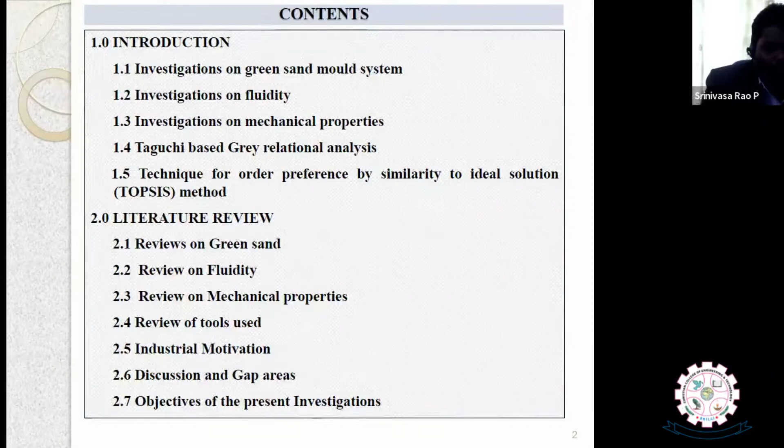So in the present lecture, we are going to discuss how to improve the casting product strength. In this talk, we are going to cover the green sand mold system, the investigations done on fluidity, and how we validated the product by studying the mechanical properties, and the technique we used to find the optimal properties - that is the Taguchi based method, and also the Technique for Order Preference by Similarity to Ideal Solution, also called TOPSIS method. We will also cover the literature review, the industrial motivation, the discussion, and the gap areas.

These are the things we are going to discuss - the experiment that has been carried out and the optimization carried out on the green sand mold, and the materials we have used for fluidity testing. So these are all the things we are going to discuss.

So, what are the various mold coatings that we have used to improve the fluidity, and what is the grain refinement that we have used, and what is the effect of that grain refinement.

There are so many grain refiners available in the market. Like yesterday, Sir was saying about graphene, which is also used to improve grain refinement, and titanium, boron, and niobium. These are all materials available in the market to improve the grain refinement of the material.

So what is grain refinement, we will see, and also what is the scrap that is affecting the fluidity, and metallography. Then we are going to study the effect of the composition of the molten metal on the mechanical properties, grain refinement on the mechanical properties, and the effects of the process parameters on the mechanical properties. So that is all.

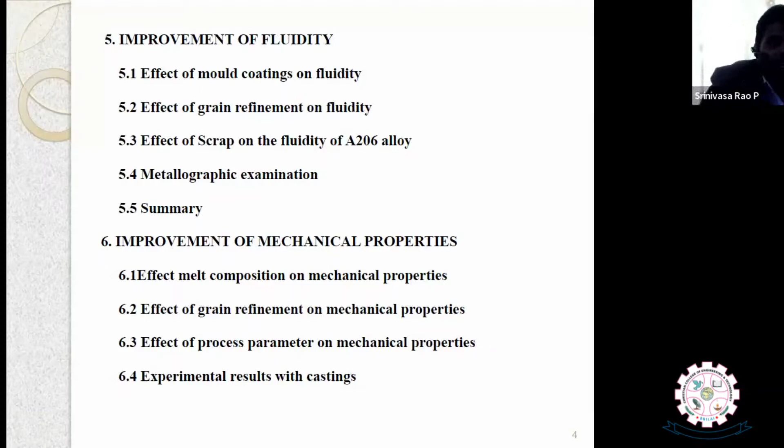Let me give you a brief introduction about the green sand mold system. Foundry is one of the ancient methods in metal forming.

According to the production data available, 70% of casting defects arise due to sand mold properties. That means if you are able to improve the properties of the sand mold, then automatically you will get good strength in the casting.

So the most common defects found in these castings are porosity, which is the major problem, along with very poor surface finish, dimensional variation, shrinkage cavity, scabs, and rat tails. You might have studied in your subject what are the various casting defects.

These defects can be minimized by proper control of properties like green compression strength, permeability, hardness, and bulk density. These are the main properties which decide the properties of the sand mold.

And nowadays, materials are being added in the foundry sector to improve the sand mold, such as wood flour, sea coal, coal dust, husk, fly ash, molasses, etc. These have been used to enhance some specific desirable properties of the molding sand.

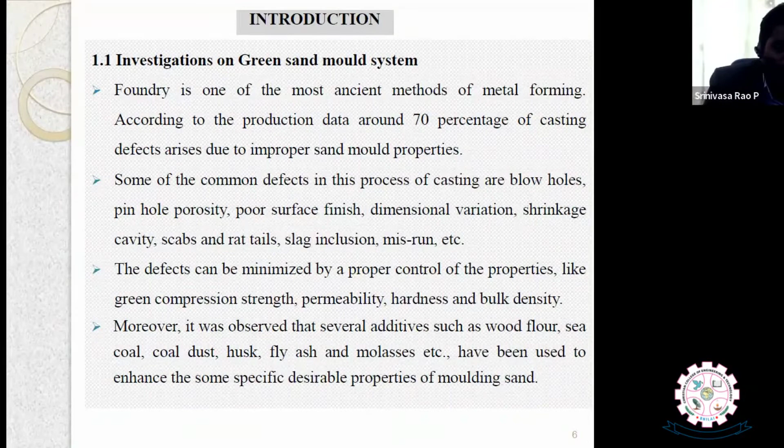If you have a low green compression strength, that leads to poor casting processing, poor surface finish, dimensional inaccuracy, and also it will create porosity. Similarly, low permeability may be a cause for blowhole and misrun type defects.

Misrun is nothing but fluidity - the ability to flow the metal will be decreased. If the ability to flow the metal decreases, then there will not be complete casting. There will be some defect, and that defect is known as misrun defect, or we can call it a fluidity defect. And one more thing we can talk about is bulk density.

That is the bulk density, which is related to the flowability of the molding sand.

So in such a way, there are many green sand mold properties influenced by a large number of parameters, which are controllable to varying degrees in our foundry. That is why, being a foundry man, he should be in a position to select the molding composition to get a substantial increase in sand mold properties, which in turn leads to quality castings. So quality castings depend upon the mold properties.

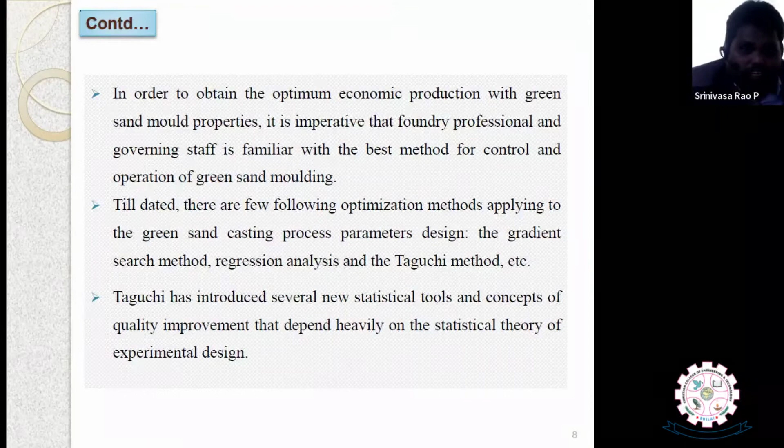So till now, there are many optimization methods used to produce quality green sand castings. They optimized the casting process parameters by using various optimization techniques, regression analysis, Taguchi method, etc. So, what is the Taguchi method?

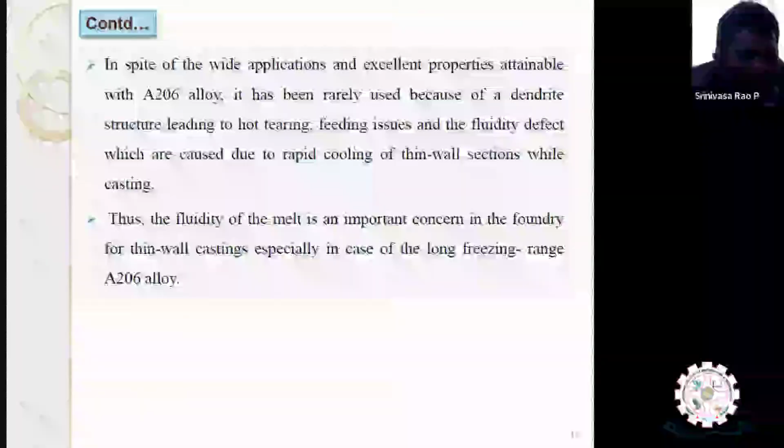We don't require that now. After making the sand mold, we are going to talk about the A206 alloy, that is an aluminum copper alloy, which has been made by using the optimized properties of the optimized sand. Optimized sand means we have taken certain parameters and made the green sand mold, and in that green sand mold we have made the casting of A206 alloy.

The problem with the A206 alloy, the aluminum copper alloy, is that while casting it, the main defect we found is that the fluidity of the melt is very important.

Misrun is the major defect in the A206 alloy. This is because the A206 alloy is generally used for making thin wall castings, and it is also called a long freezing range alloy. So that is the reason why this misrun defect occurs.

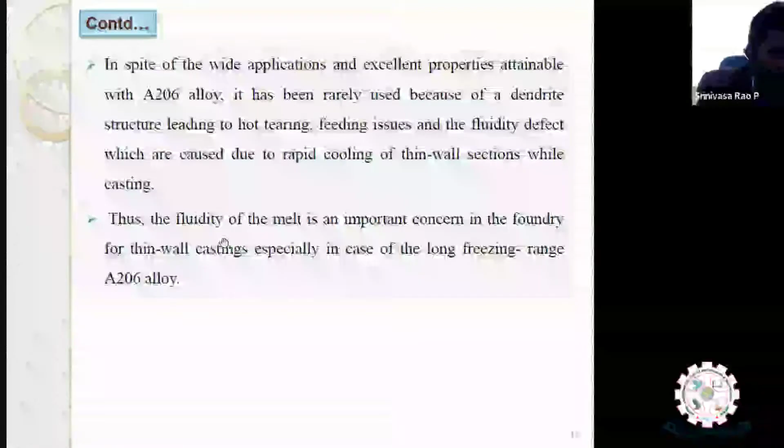A206 alloy belongs to the aluminum copper alloys, which are widely used for manufacturing thin wall castings in automotive and aerospace industries, due to high strength to weight ratio and virtuous mechanical properties. It has very good mechanical properties and high strength to weight ratio. When you talk about the marine field and aerospace industries, they think about high strength and low weight. They need less weight and more strength.

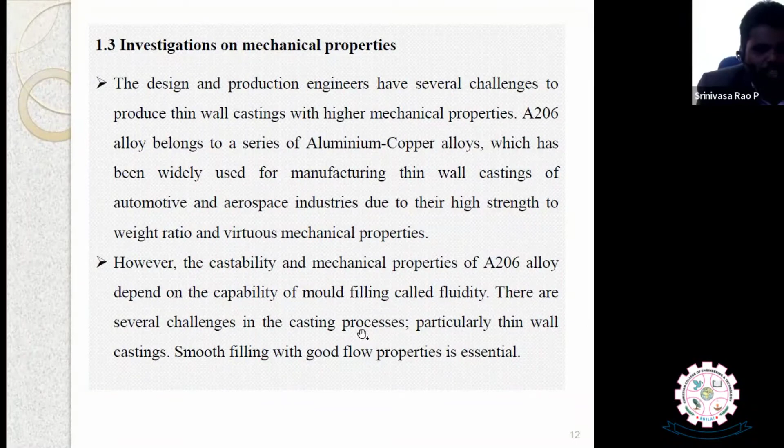However, the castability and mechanical properties of the A206 alloy depend upon the capability of mold filling, called fluidity. So there are several challenges in the casting process, particularly thin wall casting. Smooth filling with good flow properties are very much essential.

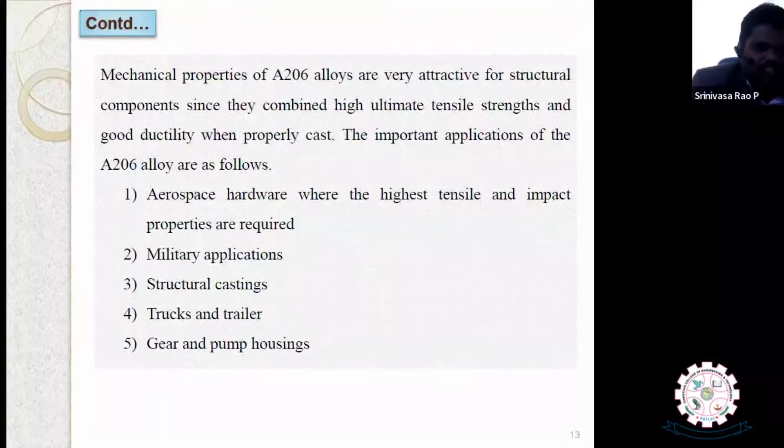Mechanical properties of the A206 alloy are very attractive for structural components since they combine high ultimate tensile strength with good ductility when properly cast. So the important applications of the A206 alloy are aerospace, military applications, structural casting, trucks and trailers, and gear and pump housings. So they have got a huge number of applications.

So the technique that we have used to optimize the casting process parameters is Taguchi based gray relational analysis, because the optimal process parameters selected are not only to improve process quality but also to be least prone to the deviation of environmental conditions and other noise factors.

Several experiments need to be carried out when the number of process parameters increase. Naturally, when the number of process parameters increase, we need to carry out multiple experiments, and it is also a tedious task. So to reduce such a tedious task, we use optimization techniques. In this particular research, we have used the Taguchi based gray relational analysis technique.

Some of you know about the Taguchi technique very well, because some of you are from a manufacturing background. We use orthogonal arrays to study the total process parameters and to study the quality characteristic by using a parameter called signal to noise ratio. I will explain this further. The SN ratio will decide the quality characteristic of the casting product, whether lower the better, higher the better, or nominal the better.

For us, we require the mechanical properties to be high, so we will take the SN ratio as higher the better mode. And also, if there are multiple responses...

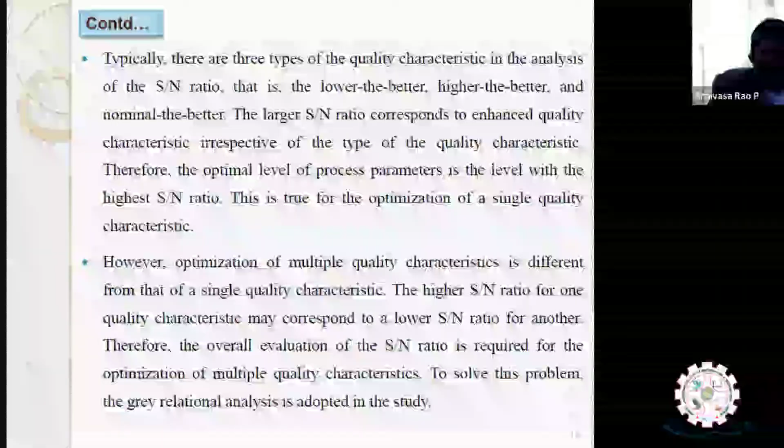Then what we do is convert those multiple characteristics, multiple quality measures, into a single characteristic, and that is what we do in gray relational analysis, to know the grade and to note the single quality characteristic, the grade, and finally the rank, and which composition of the material is giving us the best quality product, or in which composition we are getting more strength.

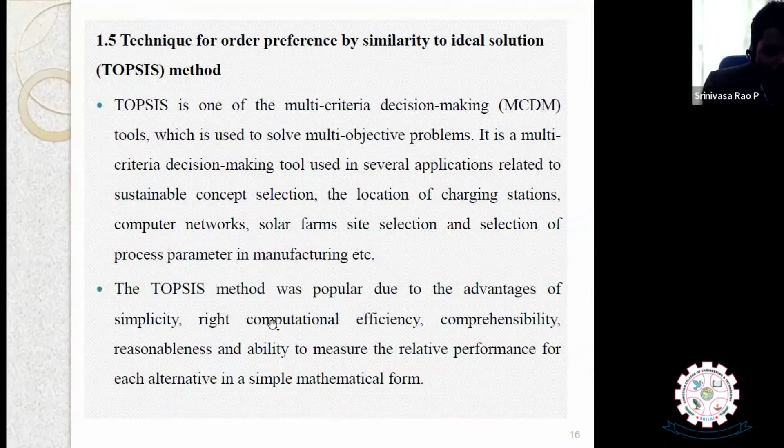TOPSIS is also another technique which we have used just to compare both the gray relational analysis and this technique. Finally, we are going to suggest which method is useful or suitable for the better optimization of the composition.

So many literature reviews have been carried out on green sand. From 1974 onwards, this research has been carried out. Even before that, they applied statistical design of experiments techniques to study and control the properties of green sand and resin bonded sand systems. However, the effect of sand grain size and the important property of permeability were left out in their analysis.

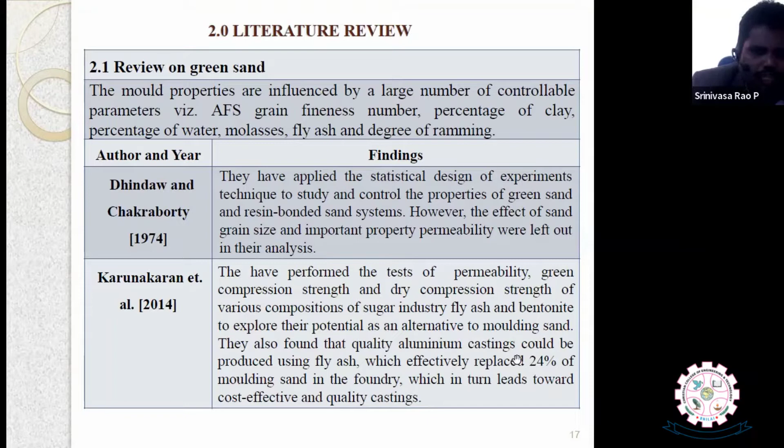Karunakaran et al., 2014, found that quality aluminum castings could be produced by using fly ash, which effectively replaced 24% of the molding sand in foundry, leading to cost-effective quality. They also studied the permeability and mechanical sand properties of green sand by adding fly ash and sugarcane molasses, etc. So these are the literature reviews that various people have carried out.

In 2012, the optimum process parameter values for multiple objectives, namely green compression strength, permeability, and mold hardness, were found using the genetic algorithm and particle swarm optimization.

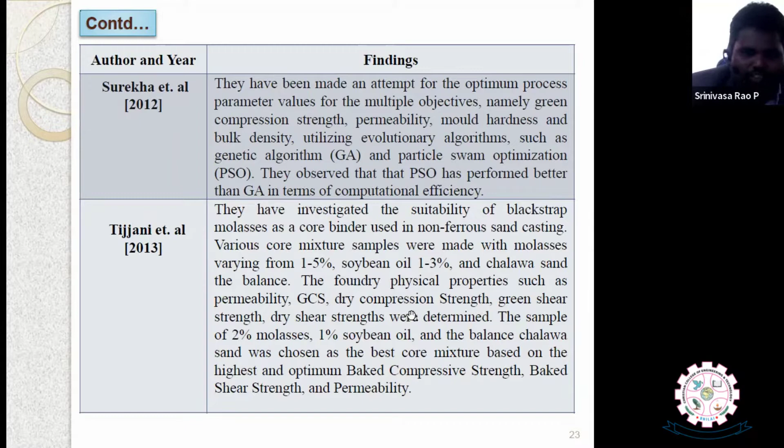In 2013, blackstrap molasses was used as a core binder to improve the sand and mold properties like permeability and green compression strength. Fluidity is also relevant here, as it relates to the misrun defect, and many studies have been carried out in this particular field.

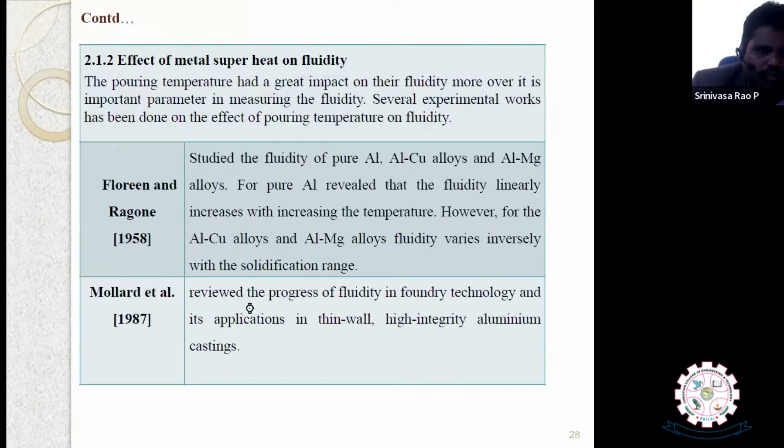Coatings also will affect and bring a positive effect on the fluidity. Several researchers have carried out research on mold coatings to improve the fluidity and reduce the misrun defect.

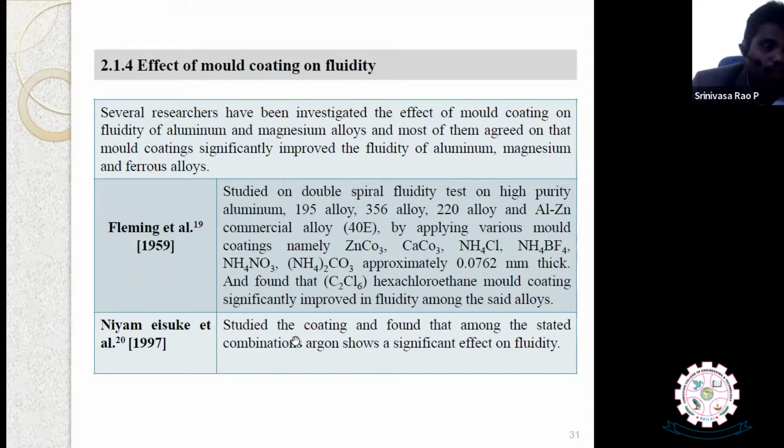So what is the motivation? In present day foundries, a quality molding sand mixture is very much required. This can be achieved by the set of input variables required to achieve the desired levels of output, that is, mold properties. Mechanical sand properties such as green compression strength, permeability, hardness, and bulk density are the major sand properties.

When it comes to aluminum alloy casting, the industrial demand for thin wall castings in aluminum alloys plays a vital role in producing lightweight castings and provides new opportunities for aerospace and automotive industries in producing lightweight structures with good mechanical properties.

These opportunities can only be realized when foundries are confident in their ability to produce thin wall castings. Production of thin wall castings is constrained by the fluidity of the molten metal. Therefore, the primary issue that must be addressed in producing thin wall castings is fluidity.

Fluidity of the molten metal is of significant importance in producing sand castings, particularly complex shape castings. That is why in the present investigation we have used scrap, mold coatings, and other elements like nickel to improve the composite material, that is, the metal matrix material A206 alloy.

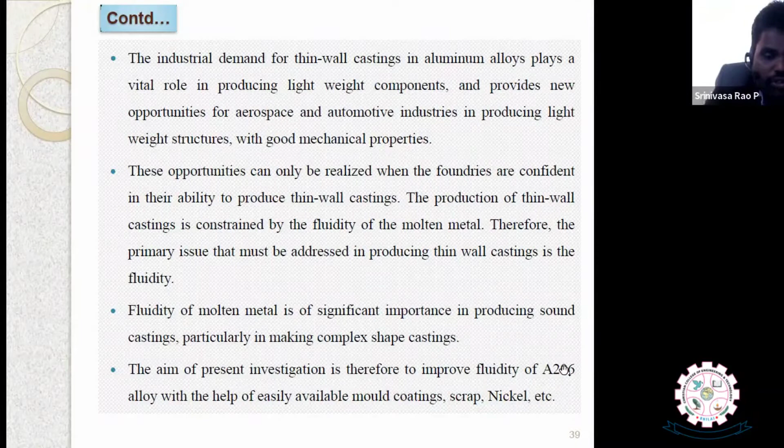So that is actually why we have to study what the research gaps are in this particular field. Several studies have been conducted on molding sand, binders, and additives, which have been widely reported in literature.

However, the influence of molasses and fly ash, along with grain fineness number, bentonite, moisture, and degree of ramming on the molding properties of green sand has not yet been investigated, and this study has been carried out.

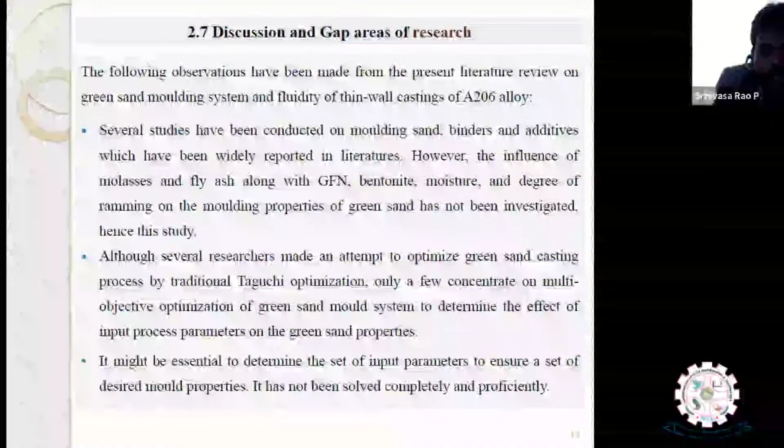Although several researchers have made an attempt to optimize the green sand process by the traditional Taguchi method, few have used multi-objective optimization techniques. It is essential to determine the set of input parameters to ensure the desired mold properties, and this has not been solved completely and proficiently.

Many others have noticed that pouring temperature and grain refinement play a significant role in the fluidity of the aluminum alloy. They made an attempt to study the influence of pouring temperature, alloying elements, and grain refiners, but no report or literature was found on the influence of pouring temperature, molding coatings, and scrap on the A206 alloy till date.

So therefore, to simultaneously study AFS and grain fineness number, and also molasses etc. to improve the fluidity, and also aluminum, titanium grain refiner in combination with various process parameters such as scrap and nickel, and fluidity using coated thin cross sections of A206 alloy, has not been investigated till date.

So our objective is to improve the green sand mold properties using various input variables and find the optimal combination, and also to determine the fluidity and mechanical properties of the A206 alloy, and study the effect of mold coatings at three different pouring temperatures.

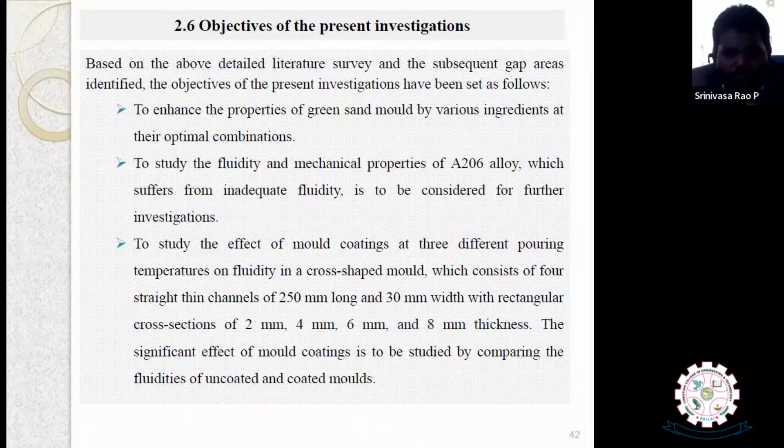By using grain refiner in combination with scrap, through design of experiments, we cast and study the fluidity by varying these process parameters. Similarly, we study the influence of pouring temperature on fluidity, and the influence of pouring temperature and grain refinement on fluidity and mechanical properties of the A206 alloy.

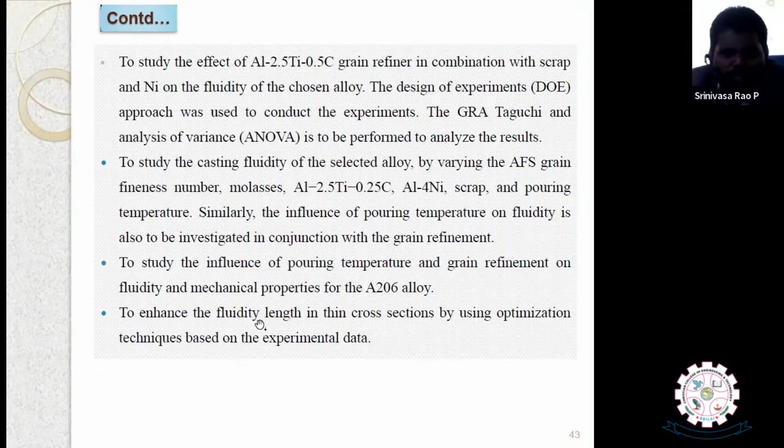Ultimately, we are going to enhance the fluidity of the thin cross section by using optimization techniques based on this, and various methodology were followed.

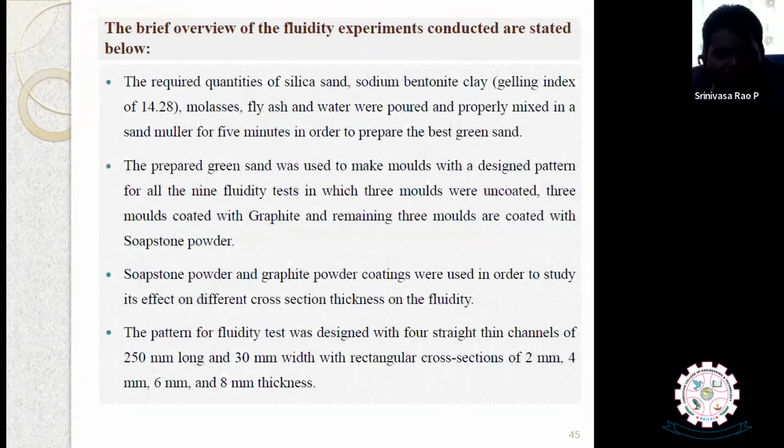These are the various tests that have been carried out. This is the sand equipment, and this is the sand muller, which is used to mix the sand with various sand additives, like fly ash, molasses, and bentonite clay that we have added.

With variable proportions added, we made the green sand with the help of a sand muller. After making the green sand, we made the sample out of this sand composition using a sand rammer. With the help of the sand rammer, we made the sand sample, and this sample is used for testing.

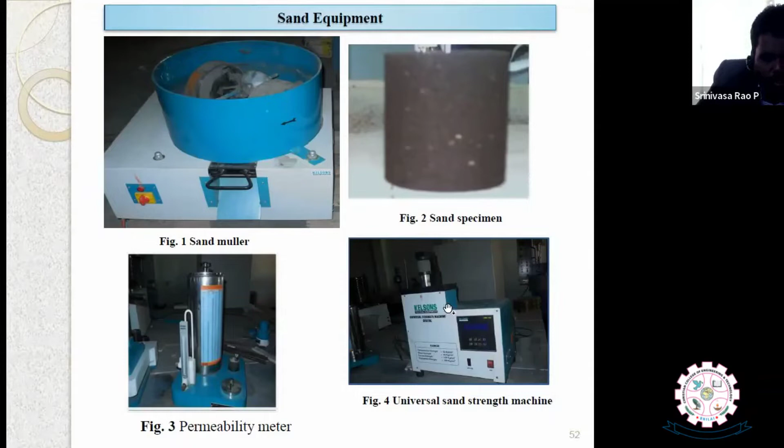We tested the permeability of the sand and the tensile strength. To find out the tensile strength, we used this equipment, known as the universal strength machine.

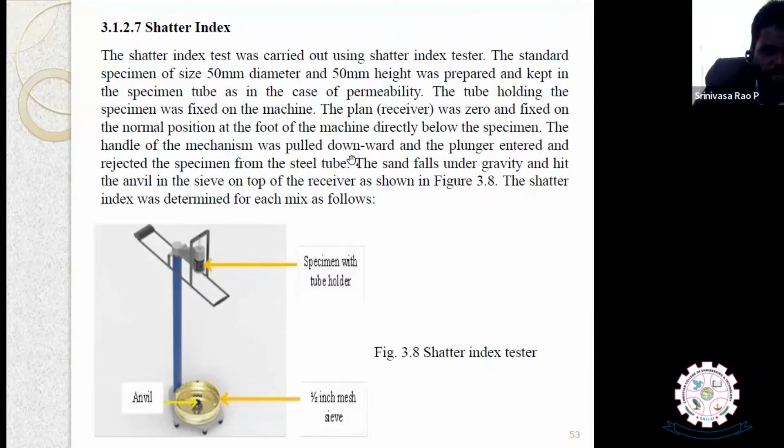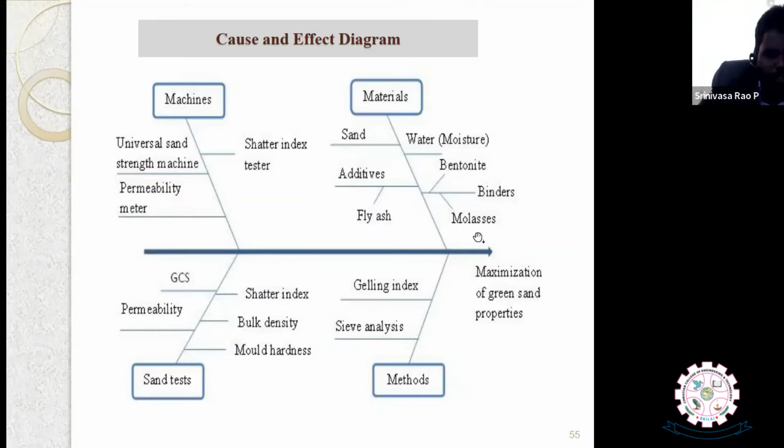These are the machines used to increase the strength of the green sand mold, and the tests carried out. The methods and materials include sand, additives, fly ash, water, bentonite, and binders. The objective is to improve the green sand properties.

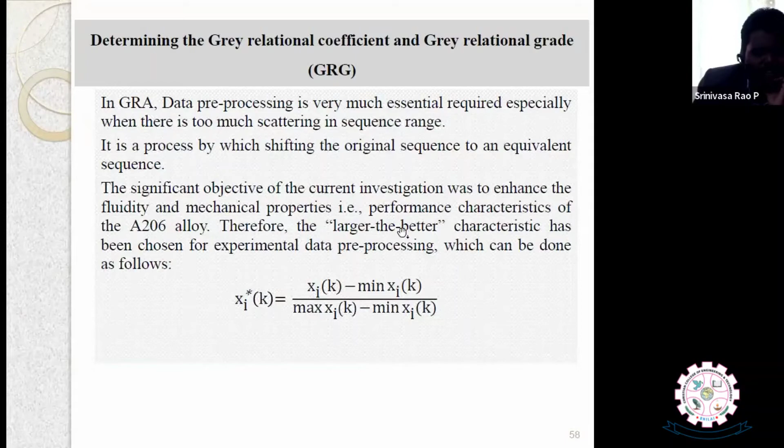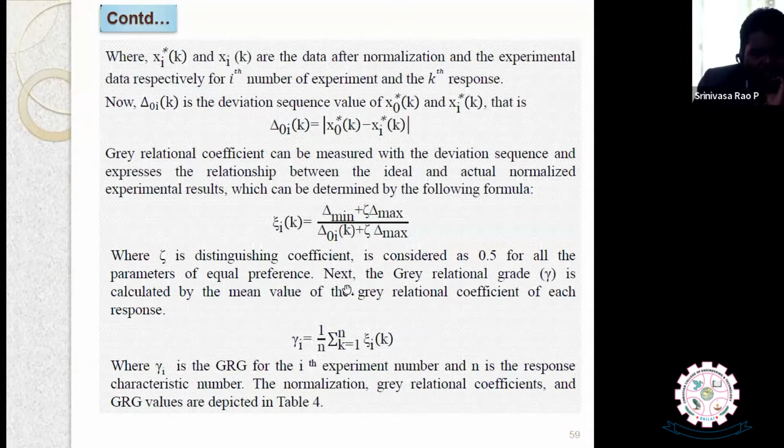After finding the deviation sequence, this is the normalized data. From this we calculated the grey relational coefficient based on the responses we obtained, and then the grey relational grade. Based on the grey relational grade, we did the ranking.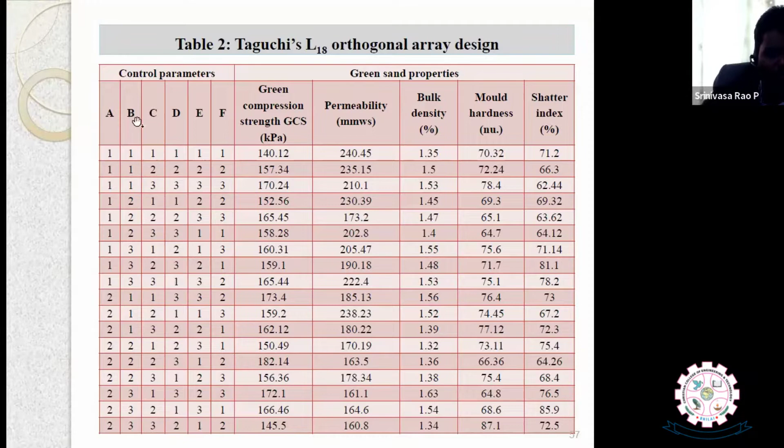If you see the seventh experiment - at this particular composition we see level 1, level 3, level 1, level 2, level 1, and level 3, corresponding to A, B, C, D, E, F, which represent grain fineness number and the other parameters at level 1 and level 2. So at these particular levels, we found the results.

So this is the level, this is the composition at which we have got the best properties of the green sand, we can say, and that is what the gray relational grade decides. So now, the larger the gray relational grade, the closer will be the product quality to the ideal value.

Therefore the optimal levels of the green sand are A1, B3, C1, D1, E3 and F1. They are represented in table 5. So A1, B3, C1, D1, E3, and F1.

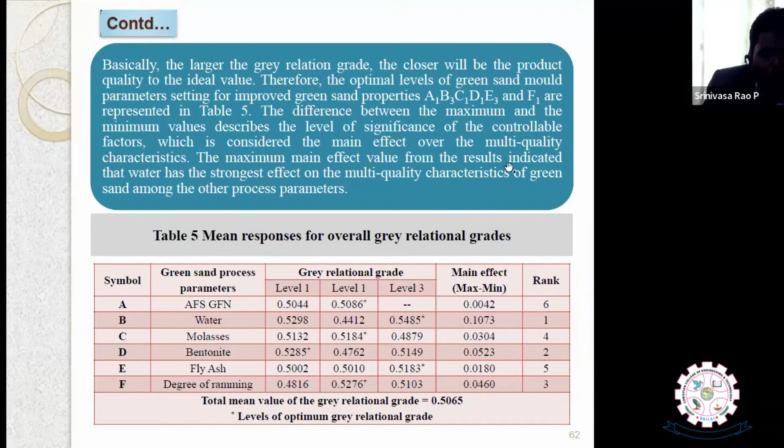This is the main response table, and then we have carried out the ANOVA analysis with the help of the Minitab software. So we get this. B is the factor, water percentage, followed by D and then F. What are B, D, and F? You can see, water and bentonite and degree of ramming.

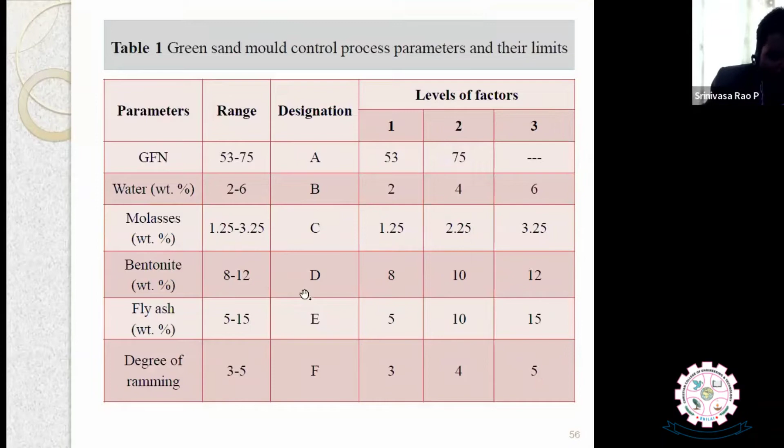So these are actually the influencing process parameters to improve the property. What is the maximum percentage? That is water. So moisture plays a very important role to improve the property. We may add many other materials like bentonite clay, corn flour, coal powder, or fly ash, and so many other products, but moisture plays a very important role because that is the binder basically.

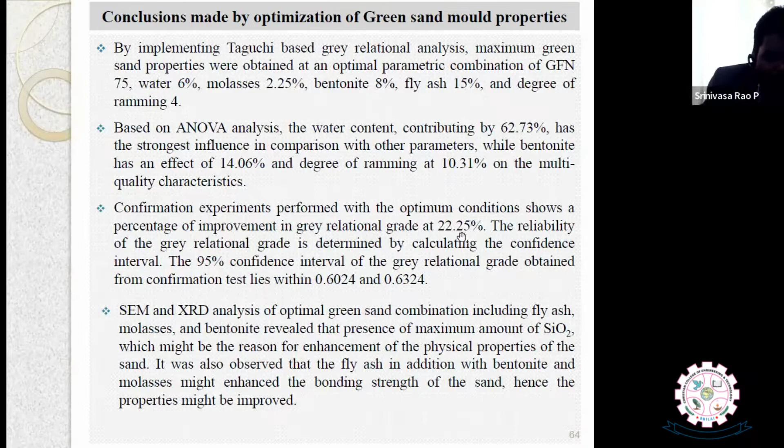So the optimal process parameter combination we have got is grain fineness number 75, water percentage 6%, molasses 2.25%, and this is the optimal composition. Based on the analysis, water content contributes 62.73% as the strongest influence compared with the other parameters. Later, confirmation experiments were carried out and we found that the grey relational grade increased to 22.25. Then XRD analysis was also carried out.

Now we will come to the fluidity of the A206 alloy. This can be improved, and now we have optimized the green sand properties. Now we have come to improve the thin wall casting fluidity of the A206 alloy. The problem is mold filling, that is misrun defect, or we can call it a fluidity defect.

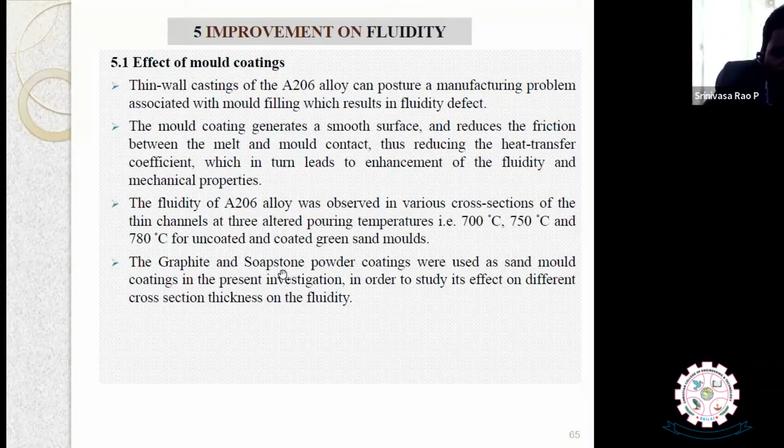So we have added various coatings. Graphite and soapstone powders are mainly used as sand coatings in the present investigation. What is the composition of the A206 alloy? Copper percentage is 4.25%, and of course there are other miscellaneous materials, and aluminum, mainly aluminum and copper.

So we have used pure aluminum and made the A206 alloy, and this is actually used for testing the fluidity. 2 mm, 4 mm, 6 mm, and 8 mm thickness of the cross section, because we need to find out mainly the fluidity of the thin cross sections.

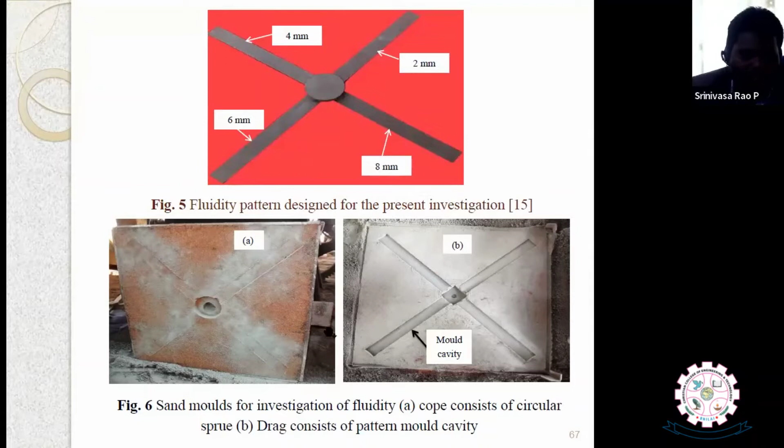So to know the fluidity of the thin cross sections, we have taken 4 cross sections of different thickness, and this is the mold we have made with the help of this pattern. This is the mold cavity, and we have used that optimized sand for the mold, sand mold, and made the castings.

First we have done the casting without coating, that means uncoated, at 3 temperatures: 700, 750 and 780. Then graphite coating at 700, 750, 780, and soapstone powder coating at 700, 750, 780. These are the pouring temperatures, and the fluidity length that we have obtained at different temperatures is this one.

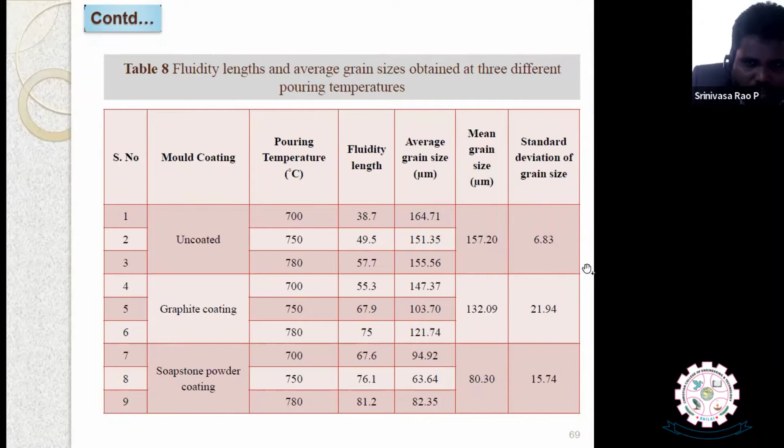After this, we have studied the microstructure and found out the grain size, average grain size, and the average grain size is this one. Different average grain sizes, plus mean grain size, and this is the standard deviation.

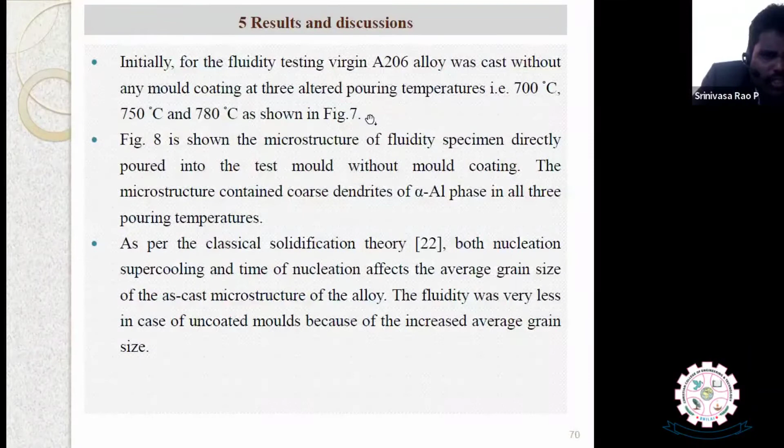So what we found is, without mold coating, the pouring temperature is as shown before. Figure 8: microstructure of the fluidity specimen directly poured into the test mold, and this one.

Graphite mold coating, let me explain. A highly suitable and appropriate, significantly non-porous and gentle mold surface can be produced by the graphite mold coatings. That is the reason why it is suitable for manufacturing ferrous and non-ferrous castings also. They will use this graphite powder.

Soapstone powder, why we use it, is because it is obtained from the hydrous magnesium silicate mineral. It is extensively used as a stuffing material, having hardness value of 1 and density 2.6 to 2.8. It is used in many applications because of low hardness, high melting temperature, sufficient chemical inertness and adhesion capability for surface coating, and high thermal conductivity. It improves cracking resistance, adhesion, and barrier properties.

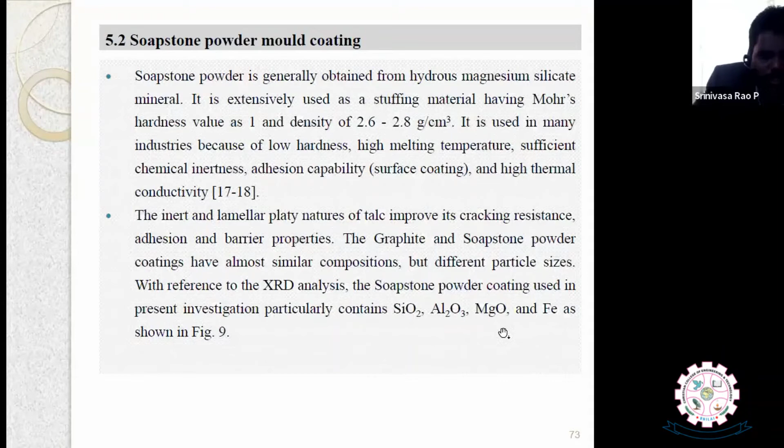The graphite and soapstone powders have almost similar composition but different particle size. With reference to the XRD analysis, the soapstone powder coating used in the present investigation contains particularly silicon oxide, aluminum oxide, magnesium oxide, and ferrous. We have also carried out the SEM and EDAX analysis for soapstone powder, and this is what we obtained.

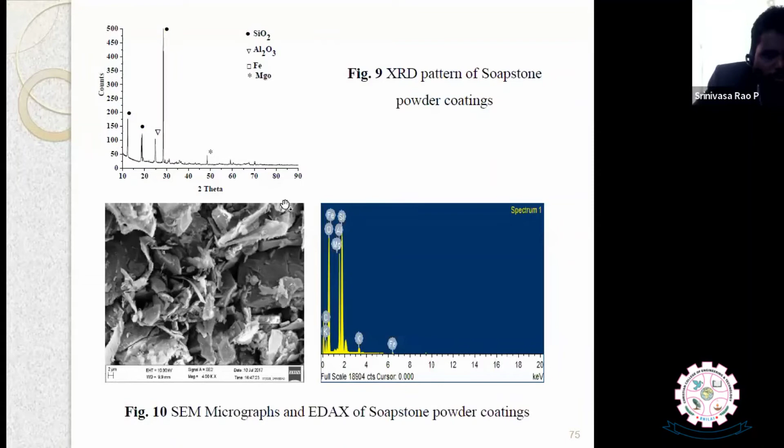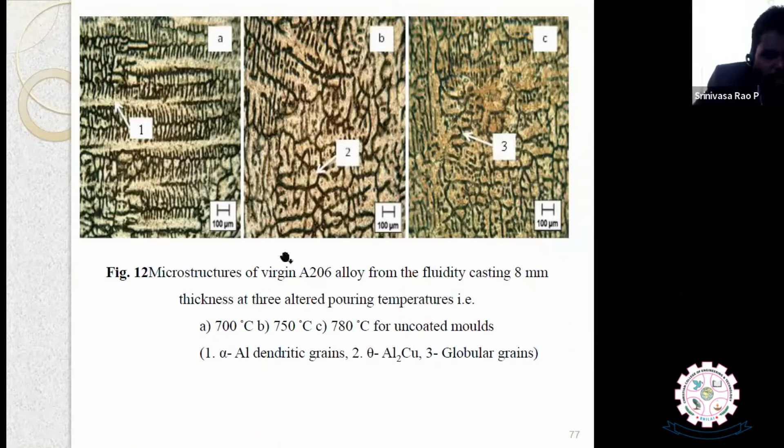These are the castings made with the help of coating, versus uncoated castings if we do not use the coating - you can see the difference. The corresponding microstructures show alpha aluminum dendritic grains, the second stands for aluminum copper, and the third one shows globular grains. This is for the uncoated specimen at various pouring temperatures: 700, 750, and 780.

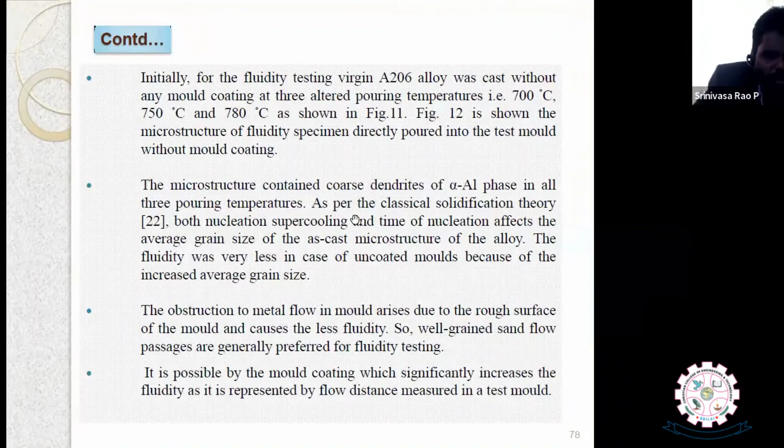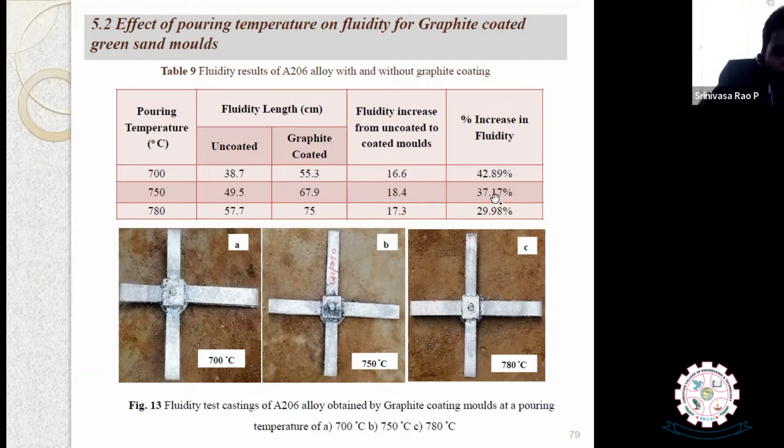So initially, then after that we did experiments with graphite coated green sand molds also for that optimized sand. We have got values for three different temperatures, uncoated and graphite coated. See the difference, how much fluidity increased by using the graphite coated sand mold. This is how the casting looks at 780 degrees centigrade, and this is how the fluidity increased - we have compared uncoated and graphite.

One thing observed is that fluidity was increased with increased cross section. Naturally, according to the formula, if we increase the thickness, as thickness increases, the fluidity also increases because it gets more space for cooling. That is the reason why at 8 mm cross section we found the maximum fluidity. These are the corresponding microstructures we see for the graphite soapstone powder.

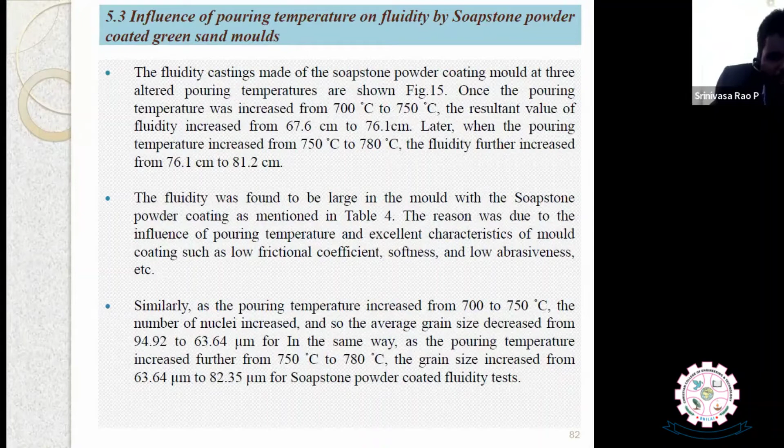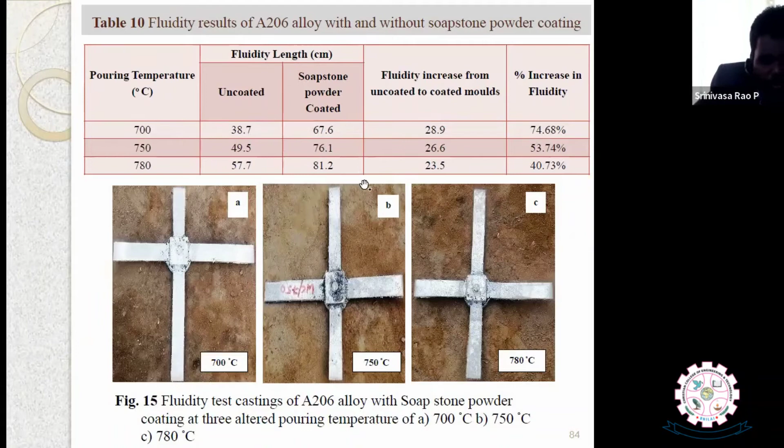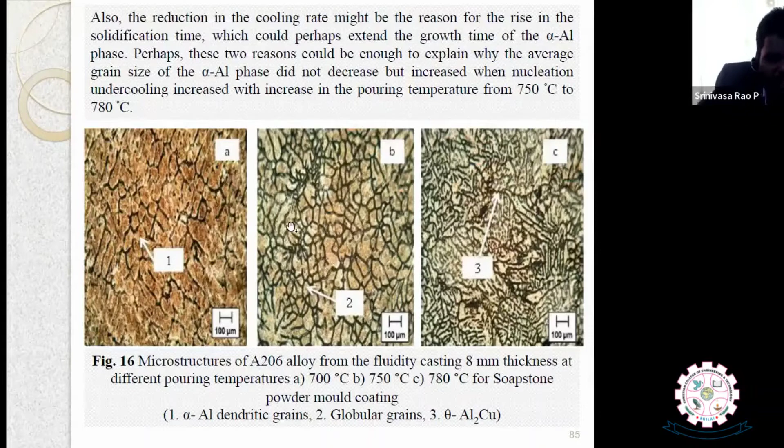So the best composition that we have got is soapstone powder only, because of the high melting point and high resistance, the fluidity increase is more as compared to uncoated and graphite. Soapstone powder has given the best results as compared to previous coatings. At 750 degrees centigrade, we see more globular grains, you can say more equiaxed grains. If the equiaxed grains are more, then the material will be stronger.

So the resistance effect - it was observed through experiment that the fluidity length increases slowly with the increase of cross section. The reason was the time required for the solidification of the metal to fill the mold cavity might increase as thickness of the cross section increases. So as thickness of the cross section increases, the time required for the metal to solidify also increases. Fluidity in the soapstone powder mold was higher compared to the mold with graphite coating, followed by the sand mold without coating.

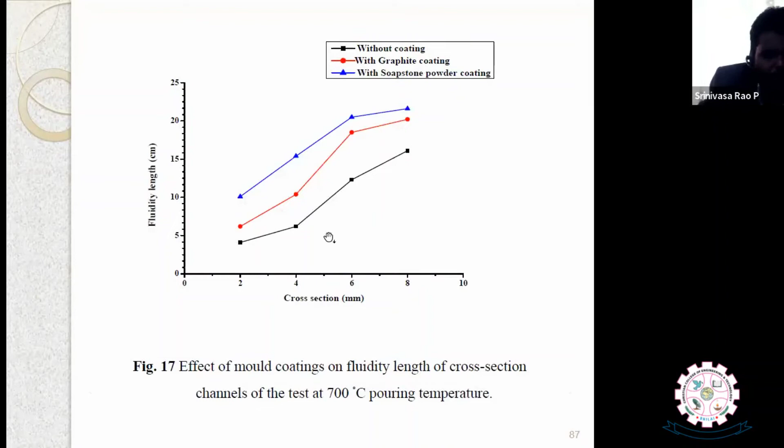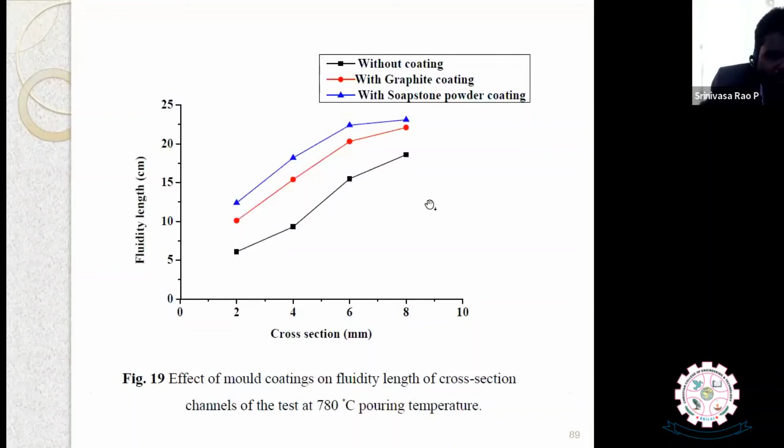More globular grains are obtained at 750 degrees centigrade. The fluidity length has been increased by influence of pouring temperature in the range of 700 to 750 degrees centigrade for both the graphite and soapstone powder mold. The reason might be due to increased supercooling and nucleation.

So then we'll come to optimization of the various process parameters of the casting process to improve the fluidity and mechanical properties of the A206 alloy. So what are the various casting parameters?

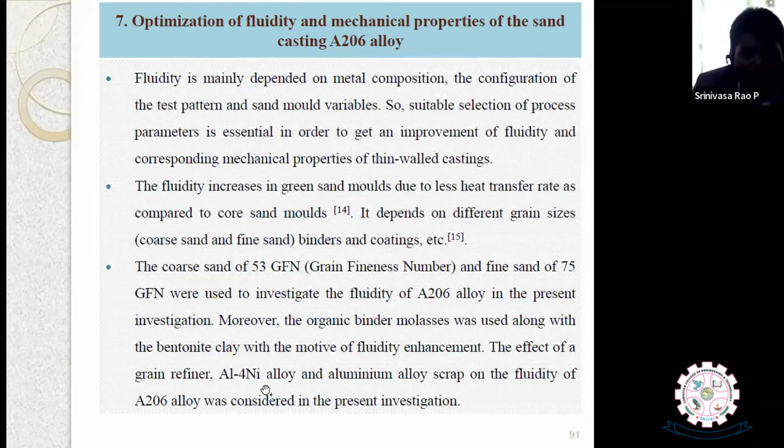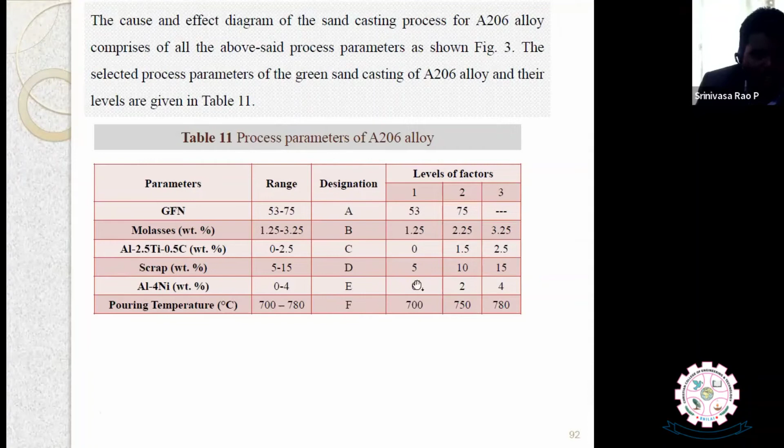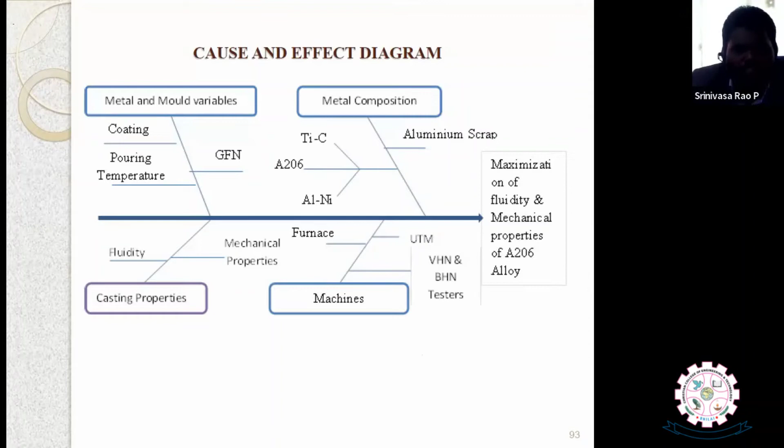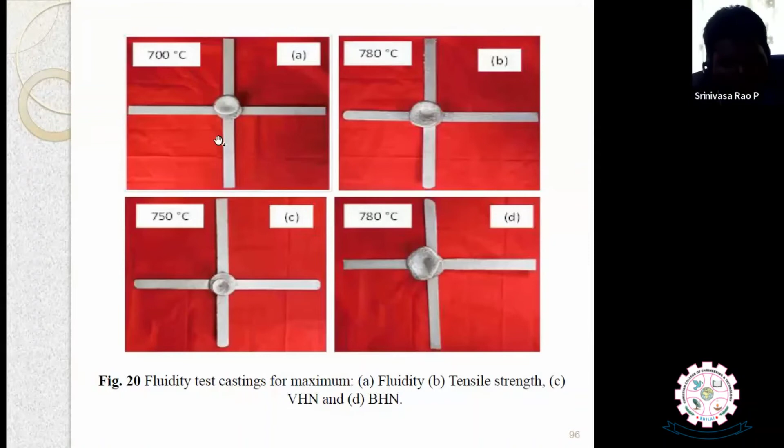We have taken the sample from the cross section and made tensile test specimens to carry out the mechanical properties, tensile strength, etc. And then we have carried out mechanical properties like Vickers hardness and Brinell hardness. So these are the situations.

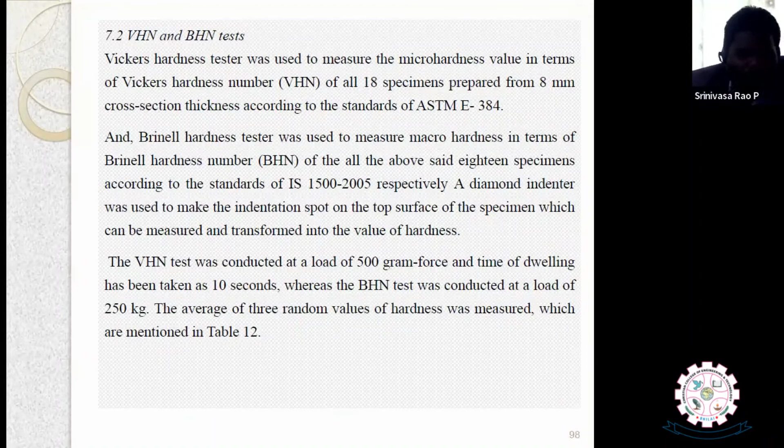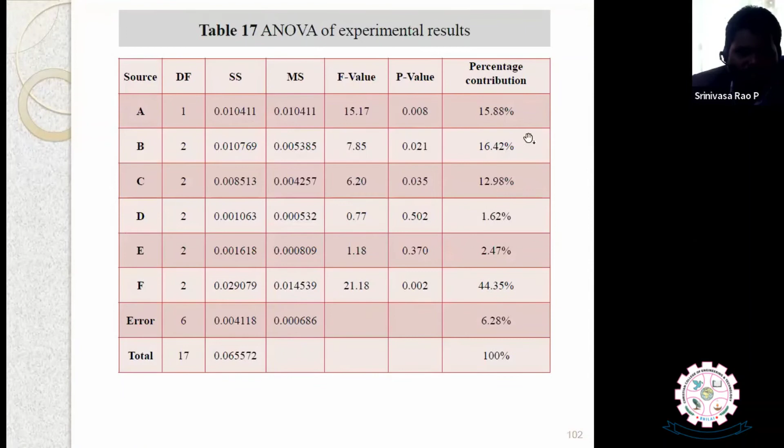That is the maximum contribution, and after that the grain fineness number also plays a maximum contribution, and then B is the molasses. So grain fineness number, molasses, and pouring temperature are playing mainly vital roles to improve the quality of castings.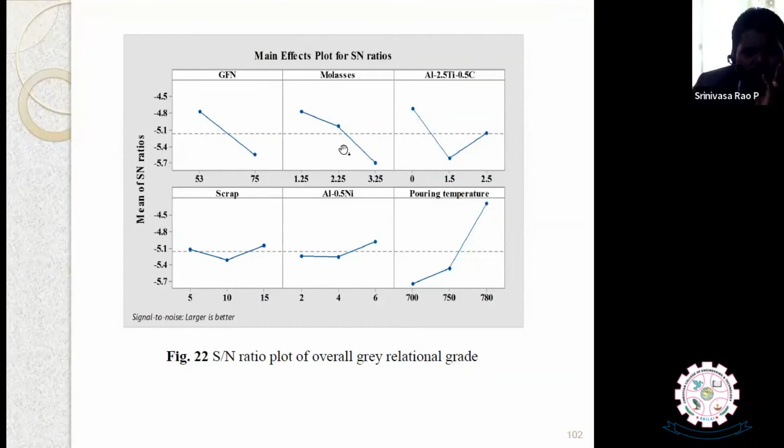So these are the graphs you see here: the SN ratio graphs and effect of pouring temperature. The linear relationship between pouring temperature and fluidity describes that increasing pouring temperature causes delay in the nucleation and growth of fine grains at the tip of the molten metal in the test channel, hence the fluidity increases.

He has given the reason why pouring temperature increases the fluidity: it delays the nucleation and growth of the fine grains at the tip of the molten metal. That is the reason why the fluidity length increases.

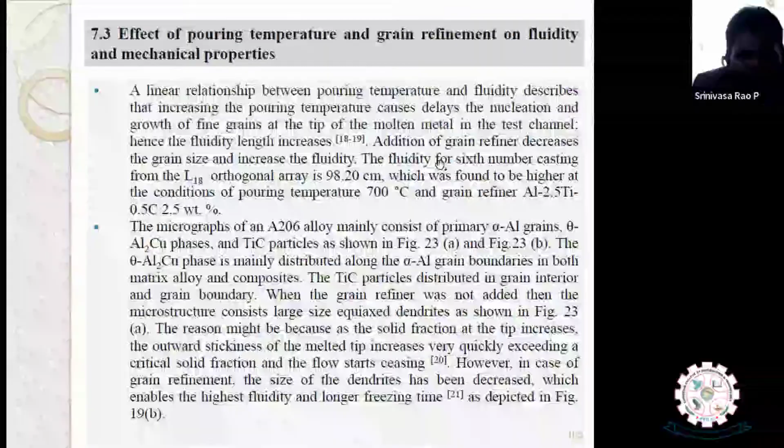Also, addition of the grain refiner decreases the grain size—it sharpens the grain size, making the grain globular. And if the grain becomes globular, that means equiaxed, then naturally the fluidity will increase and the quality of the casting will improve.

That is what we observed in the sixth experiment, where we found that the fluidity length is 98.20, with the corresponding pouring temperature at 700 degrees centigrade and grain refiner at 2.5 wt.%. We carried out the microstructure also for this optimized condition.

So we have got this type of microstructure, and if you see the micro hardness value for the second number of casting from the L18 orthogonal array, it is 85.

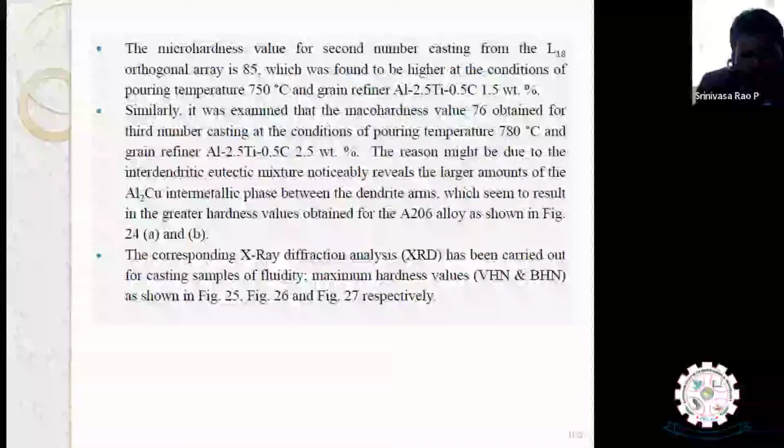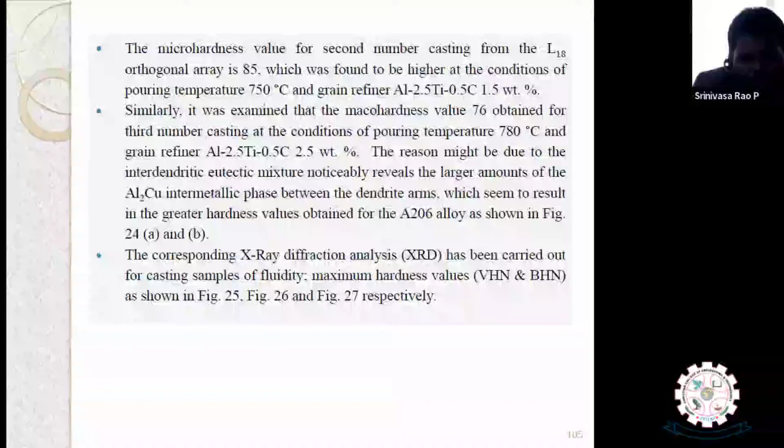That was found to be higher at the condition of pouring temperature 750 degrees centigrade, and grain refiner at 1.5. Similarly, it was examined that micro hardness value of 76 was obtained for third number casting at the condition of pouring temperature 780 degrees centigrade, and grain refiner 2.5 wt.%.

What the reason might be due to is that the interdendritic eutectic mixture noticeably reveals the larger amounts of the aluminum copper intermetallic phase between the dendrite arms, which seems to result in the greater hardness values obtained for the A206 alloy, as shown in figures.

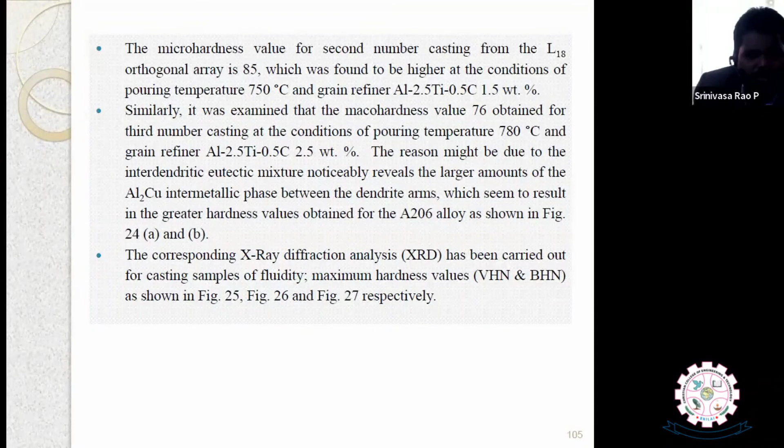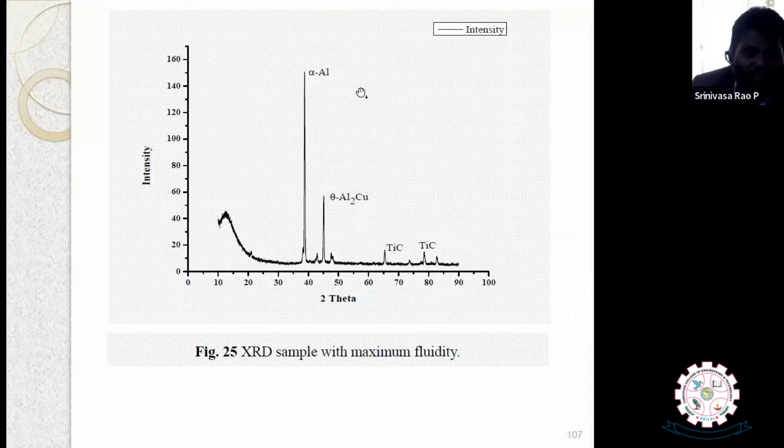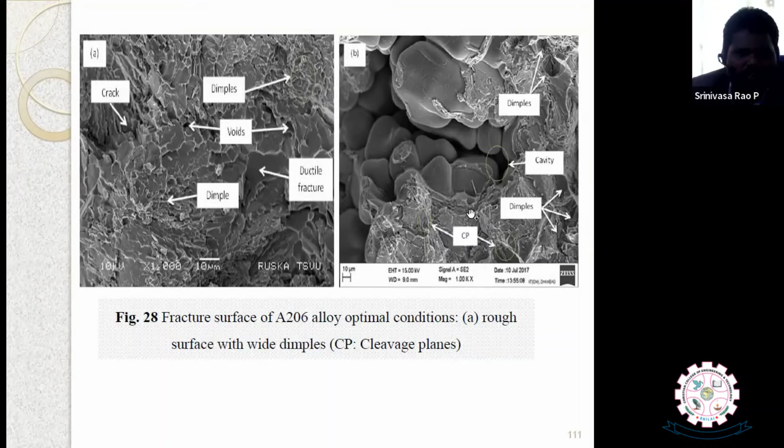So, SEM analysis for optimal conditions of the tensile strength specimen. You see the voids and dimples, ductile fracture with dimples. You see this is the cavity and dimples. And finally we have carried out the microstructure analysis.

We see the grains are in the form of globular, meaning equiaxial grain type structures. Therefore, we can say modified green sand samples consisting of various percentages of molasses and fly ash.

the optimal parametric combination is 75 GFN, water percentage 6%, molasses at 2.25, bentonite at 8, fly ash at 8, and degree of ramming is 4.

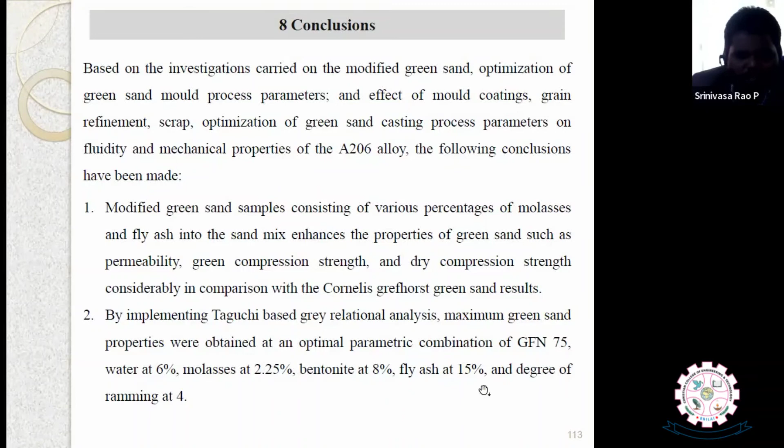Also by using fly ash, bentonite, and molasses, we can say the bonding strength of the sand will be increased, hence the properties are improved.

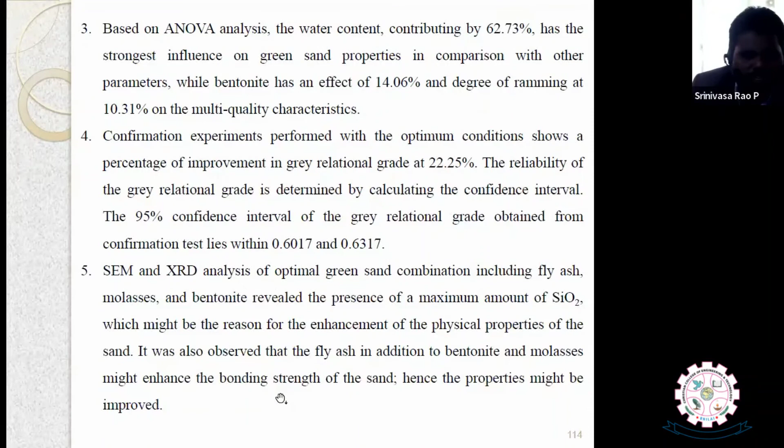Pouring temperature plays the main role, and soapstone powder coating also plays a main role to improve the fluidity. The present investigation results show that a reasonable enhancement of the fluidity can be obtained by using mold coatings like graphite.

SEM, XRD and EDAX analysis has been carried out, and graphite and soapstone powder coating have nearly similar composition, which is helpful to study the particle size coating.

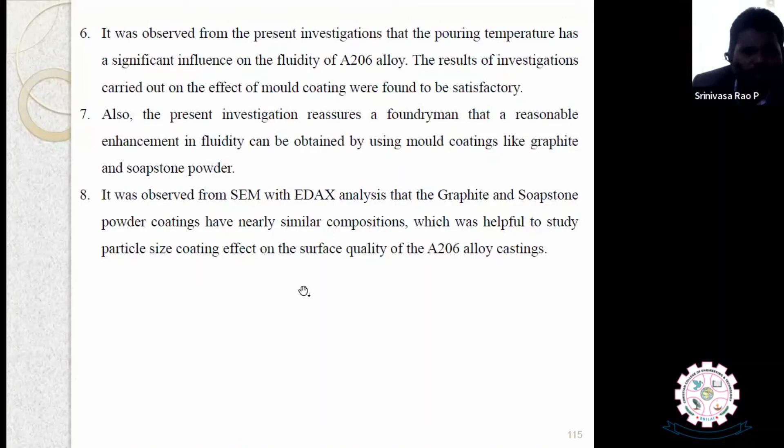A206 alloy attained by soapstone powder molding was higher compared to graphite mold coating, because the contact angles are large. A206 alloy showed increased fluidity with the thickness of the cross-section channels, and the technique of the cross-shaped fluidity test was reproduced to improve the scattering range of the fluidity test.

The fluidity was improved significantly by grain refining, especially at lower pouring temperatures. So these are actually the results.

Based on the analysis, which parameter is contributing more was also decided. The predicted closeness value of TOPSIS is found to be higher as compared to GRA. When we compare both, what we are doing is predicting values only, and comparatively the predicted value is much closer in the case of TOPSIS. So this is how the gradients also work.